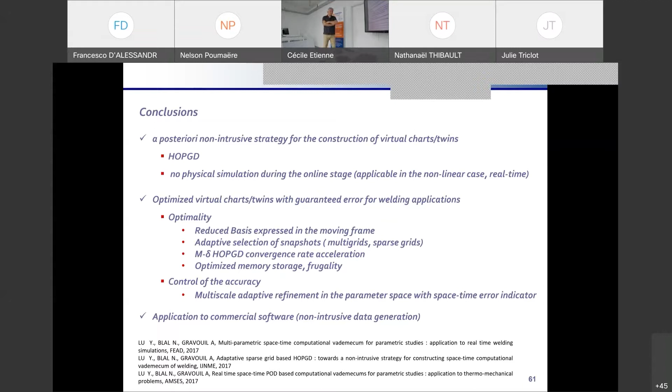So after this first introduction on physically based virtual twins, I propose a discussion on different prospects, improvements, or new applications of such virtual twins.

For instance, in the previous virtual twin dedicated to the real-time simulation of the welding process, we considered all the balance equations of the physics: balance of mass, linear and angular momentum, first and second principles of thermodynamics, and a given stress, nonlinear stress-strain law with possible internal variables.

Some other possibilities can be used today to build other kinds of virtual twins based on experimental data, which are called, for instance, data-driven virtual twins. This fits in the general framework of data-driven computational mechanics, which is very active at this time, for instance the ideas of Ortiz and many other authors in this area.

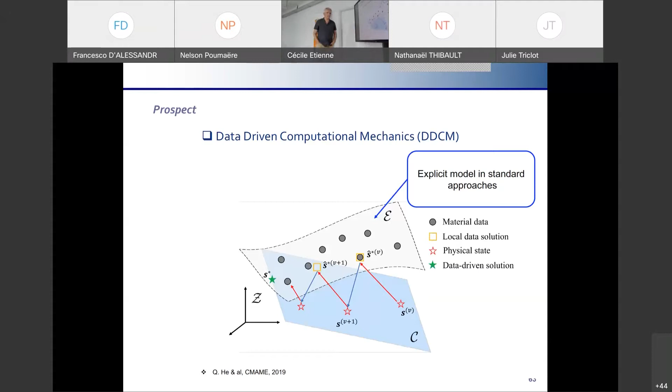There is a key point in data-driven modeling in order to build, for instance, virtual twins for welding or other kinds of multiphysics or multiscale problems: we assume that we have data, we assume that we have experimental data. But in practice, it is not so easy in solid mechanics, for instance, to have experimental data.

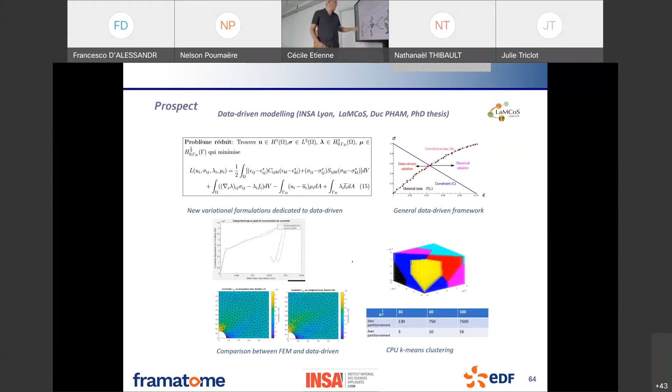Now I want to switch to another topic, which also concerns virtual twins. I focused in the previous presentation on material parameters - if we consider the space parameter, the time parameter, we can add material parameters. This is what we have done on virtual twins dedicated to welding processes, for instance. We have also focused, in a very simple case, on heat source parameter, an external load parameter for the system. And a very interesting topic also concerns geometric parameters.

We have already discussed the thickness, for instance, on the welding process of a plate, in order to develop virtual twins with a very simple first attempt at geometric parameters. But in the general case, it is a very complex task where we have to compare completely different geometries. A very interesting example comes from biomechanics, where you have to compare different kinds of meshes.

Which come from specific applications of virtual twins to aortic aneurysm. And in this case, if you compare two different kinds of bodies, you have completely different geometries.

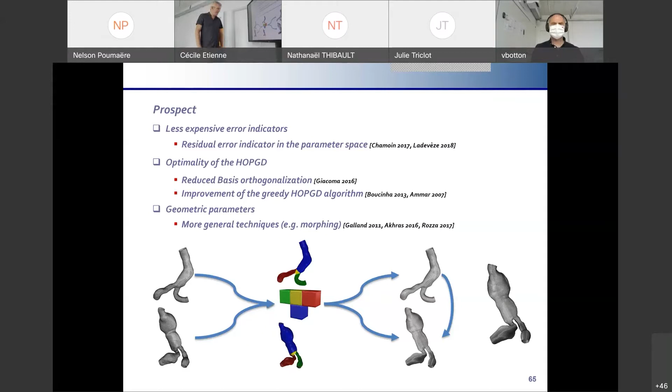In other words, a parameterization of the boundary and also the bulk. So we have to develop important concepts in topology in order to reach this goal. I propose here an isogeometric analysis, a suitable Trivariate model generation dedicated to ROM with geometric parameters. It is a complex way to explain what I said before, but it is the same thing.

So the fundamental question is: imagine you have two meshes, how do you compare the two meshes? Because we have not the same number of nodes, the same number of triangles. For instance, if you have a triangle decomposition mesh of the boundary.

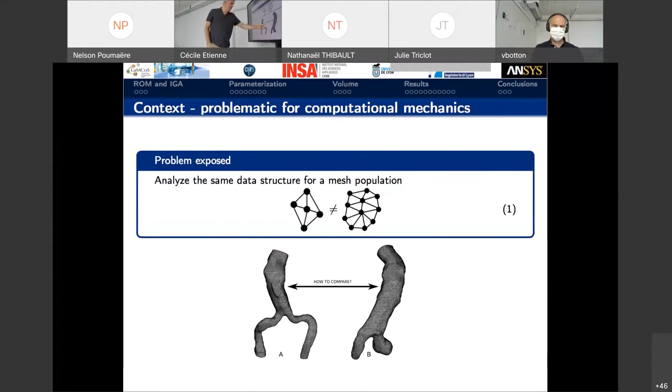In this case, the general aim is to be able to develop such a hybrid twin, a virtual twin. You have biomechanics applications, but also here, this very simple example comes from linear elasticity, solid mechanics. So the idea is to develop the same strategy as before, where you have geometric parameters linked to this problem.

And here you can have geometric parameters, material parameters, and what you want is that in real time, you get the new geometry and the new fields on the new geometry in real time. So here, for instance, the quantity of interest plotted on this new mesh is the displacement magnitude.

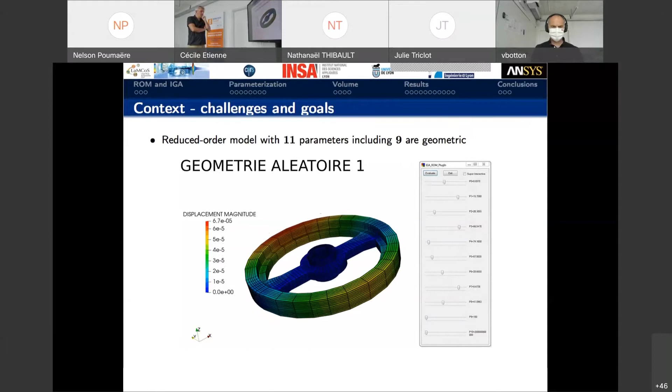In a linear elastic problem with specific external loads, what is interesting here is that you can see in real time, modify specific thickness, diameter, or length, and you have in real time the new solution on the new geometry.

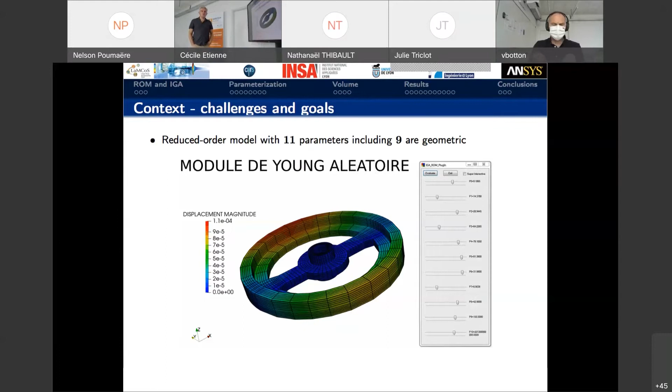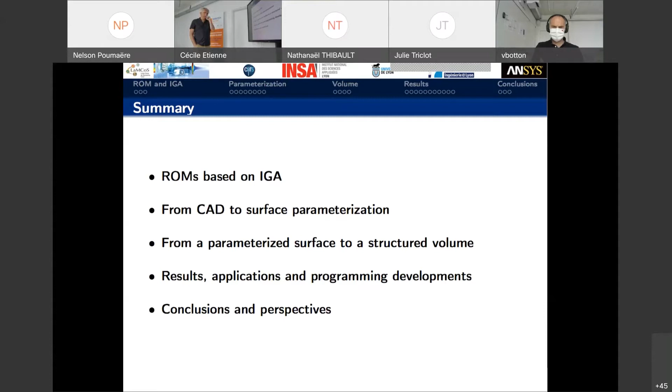We propose a general strategy based on isogeometric analysis, because isogeometric analysis is a very interesting way proposed by Professor Hughes in the United States, I think more than close to 15 years ago, in order to make a strong link between CAD and meshing and finite elements. This is an interesting starting point in order to reach the goal of virtual twins on geometric parameters.

So imagine that you want to make a link between computer-aided design and computer-aided engineering analysis, for instance, based on finite elements. You need a discretization, and the standard way is to use a finite element mesh.

However, as you know very well, in a finite element mesh, the description of the boundary strongly depends on the shape functions. And if you have a curvature on the boundary, you have only an approximation of the curvature in the finite element mesh according to the degree of the shape functions.

So from the exact geometry - what we call the exact geometry is the modeling in the computer-aided design software of the geometry, based for instance on splines and NURBS - the question is: is it possible to put this information in the finite element model instead of having an approximation of the geometry?

So if you want to modify a parameter, you have to come back to the CAD and then build a new mesh and so on. So it is quite expensive, not efficient, not frugal, okay?

Instead of doing this, we can proceed in this way. Imagine that you keep information of the true geometry, and then you put it in the finite element model as an information of the interpolation on the boundary and the bulk. So it is what we call isogeometric analysis. In this case, the shape functions are based on the functions used in computer design, okay, splines and NURBS. So it is a specific method.

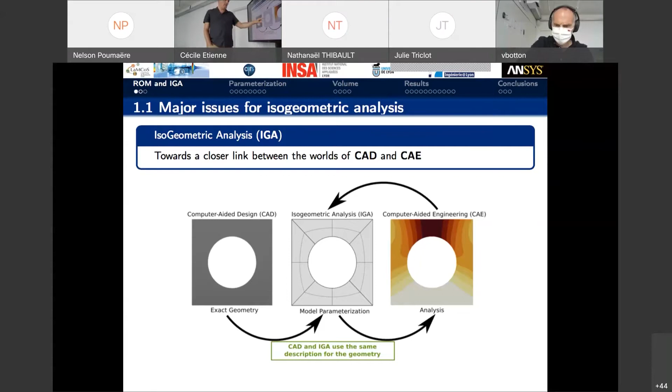So the question is: is it possible to build, in general, a quad decomposition of a complex geometry, and also a cuboid decomposition? It is an old dream, in fact, in meshing. Is it possible to build a mesh for complex geometries based on cuboids? So it is a complex problem in practice until recently.

So what is important to notice also is the information that we have from computer design. In practice, we have not bulk information. We have only information of the boundary. This is called BREP modeling, which is used for CAD, and is the basis for isogeometric analysis.

However, as you can see here, we have only the information of the boundary. BREP from CAD doesn't contain information in the bulk, I mean splines and knots in the bulk. It is only defined on the boundary. So there is also the question in isogeometric analysis of building knots and spline shape functions in the bulk of the mesh, which is not in the BREP model.

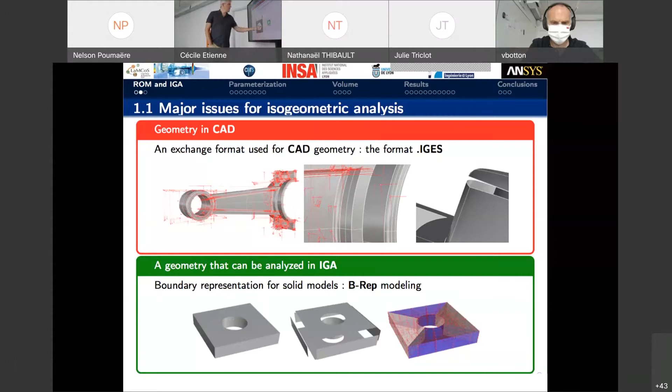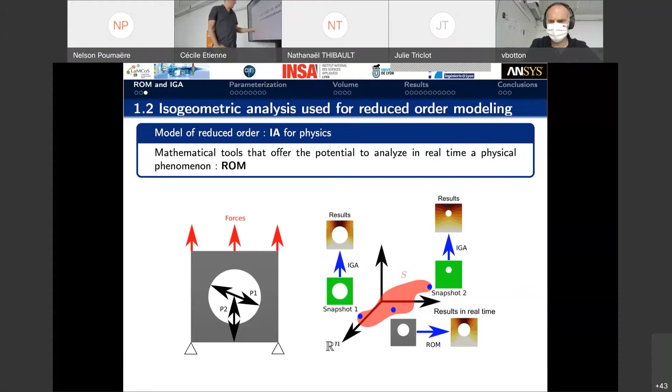Okay, some information. Generally speaking, a key point in the proposed approach is the quad decomposition. So I propose to give you some information from topology in order to understand the interest of quad decomposition in such an approach. And a key point is the Euler characteristic.

So if you have a closed, sufficiently smooth surface, possibly with holes in terms of topology, you can define the number of patches required to cut this surface in different pants. The number of pants is no more than 2 times the genus of the surface, plus b minus 2. I'm very impressed by this result, because here you have the number of pants required to cut a complex surface, like a sphere with 3 holes, which is no more than a pants, in fact. And this is very interesting because of 2 fundamental results.

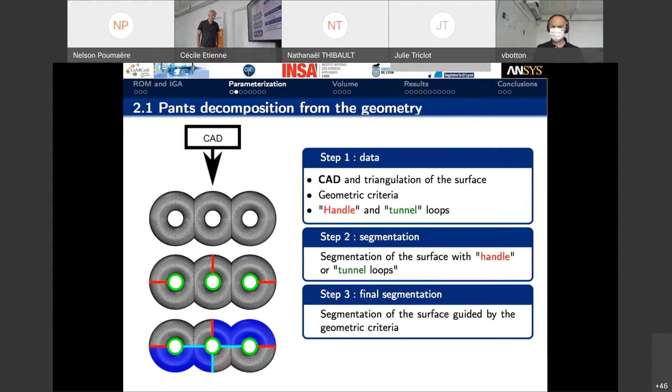So the idea is the following. First of all, a pants decomposition of a surface based on triangles, for instance triangle meshing of the boundary. Because if we are able to build a pants decomposition, then we are able to build a cuboid decomposition of the bulk, and by ensuring compatibility of the cuboid decomposition at the interfaces between the pants, we then have a global cuboid mesh. This is what I want to explain now.

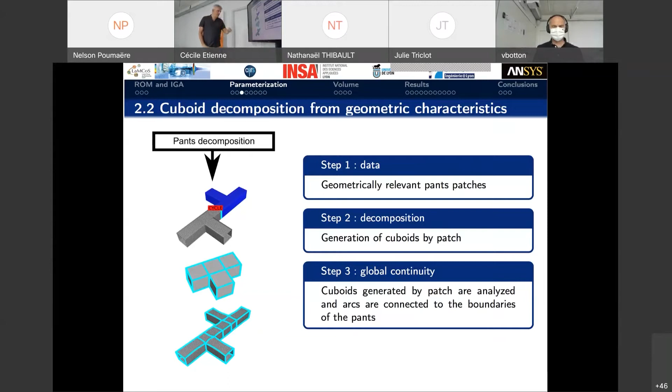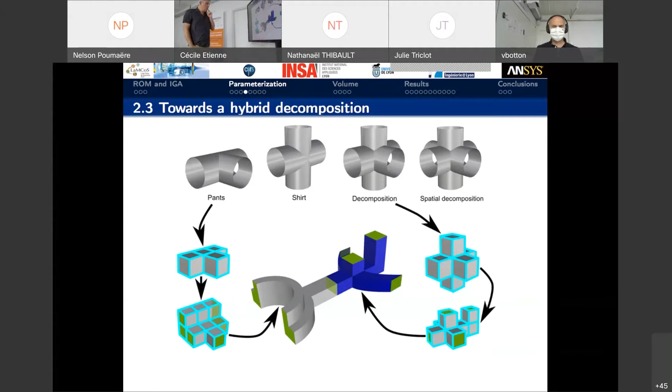We can generalize the concept of pants, but it is no more than an extension of pants in some cases where it is better to proceed to other decompositions, which are quite simple, in order to have, whatever the process, a cuboid decomposition. Even though we have a general result for pants, sometimes it is better to locally improve a pants in such a case in order to obtain a cuboid decomposition. What I want to explain is that in theory, a pants decomposition is enough to obtain a cuboid decomposition, or you can slightly improve the idea on specific geometries locally. Whatever way you follow, you have to end up with a cuboid decomposition.

A last important result from topology concerns the boundary. For the cuboid decomposition, I will explain later how to proceed. However, we need another step: the question is the parameterization of the boundary and the parameterization of the volume.

In fact, it is not so clear to have a quad decomposition of the boundary, because if we have a parameterization of the geometry, we have a quad decomposition of the boundary. Or if we have a quad decomposition of the boundary, we have a parameterization, because the quad is intrinsically a local tensor product of the boundary, which is not the case with the triangle. You have a non-uniform mesh, or non-plane surface - you cannot easily build a parameterization in terms of a non-Euclidean manifold. A local parameterization of the boundary is not easy with triangles, but with a quad decomposition, it is very easy.

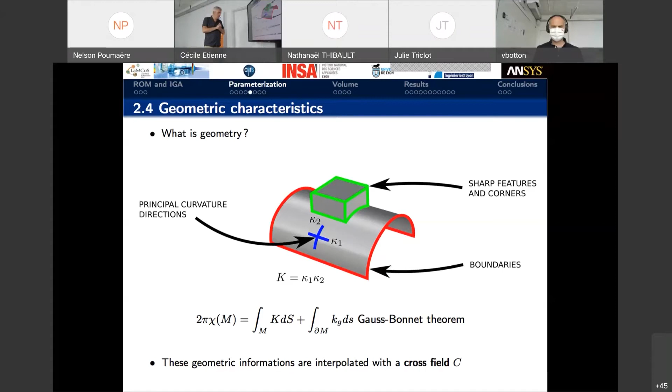Okay, so for that, there is a very nice method which comes from specialists of imaging and modeling of volume and surfaces, which is called cross field. So a cross field is no more than a way to build automatically a parameterization of a surface, for instance, based on triangles.

So there are some difficulties in order to build the parameterization of a non-planar surface because you can have singularities and so on. For instance, as you know very well, it is not possible to build a parameterization of a sphere with no singularities. You have a singularity on a sphere, and you can see it here. It is a well-known theorem.

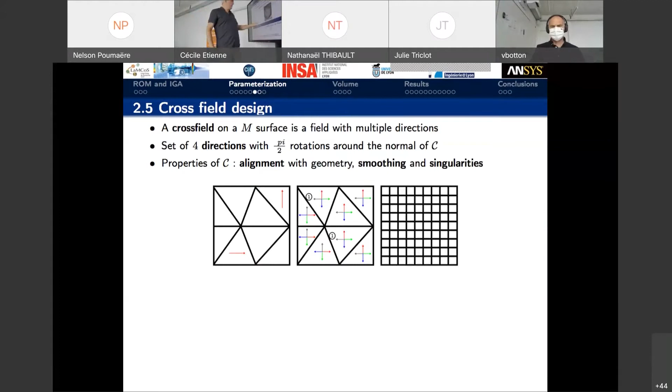So you have to account for also the problem of the singularities in parameterization of a surface. Okay, so it can be done by the Crossfields. You have a strong link between the Euler characteristic of the surface, which is a closed geometry of a volume, and the possible singularities which are to be accounted for in the parameterization of the surface. So here, as you can see, there is a link between the number of singularities and the Euler characteristic.

Okay, some examples of the application of Crossfields. Imagine that you have a given mesh based on triangle decomposition of the boundary. So we can proceed to a point decomposition. It is quite easy, in fact, to obtain a point decomposition. But the difficulty is to combine the point decomposition with the parameterization of the surface. Okay, so here the Crossfield reaches this goal.

It is a local field, okay? And this Crossfield is no more than a tensor product of two 1D functions, a combination of two 1D functions, which can be built automatically with specific constraints in the fact that the parameterization of the surface has to be compatible with the boundary of the point decomposition. Okay, so it is no more than the fact that the parameterization has to be parallel locally to the boundary. There is an iterative process that we can apply on the Crossfield in order to be compatible with the boundary. And at the end, we have a local parameterization of the non-planar surface put on the cuboid decomposition.

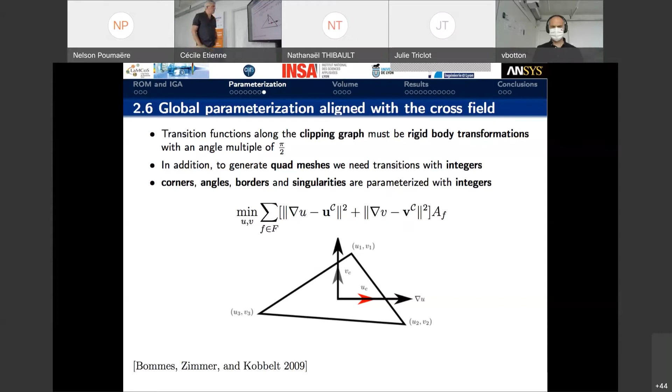Okay, and then at the end, what you have is not only a cuboid, but a band decomposition. We have not yet cuboid. So here we have a band decomposition combined with the Crossfield, a parameterization of the surface. So here it is an initial Crossfield, and after, as you can see here, the parameterization of the surface is not yet optimal because it has to be compatible on the boundary of the band decomposition. So now it is compatible, okay? So we have also to ensure the compatibility of the local parameterization on the boundary.

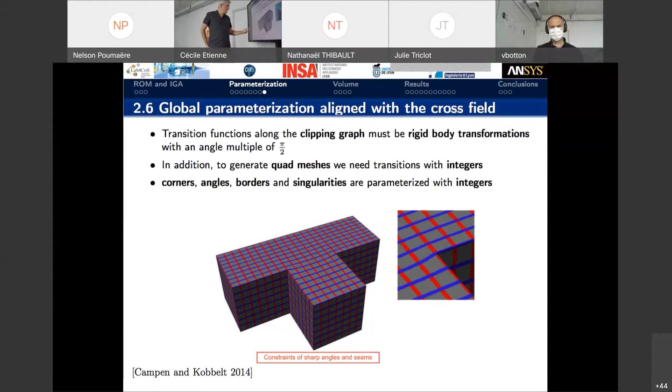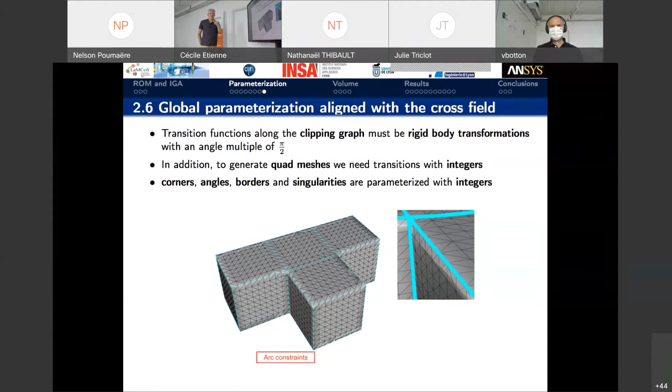And then we have something which is quite interesting, a cuboid band decomposition and a parameterization of the surface, compatible with the boundaries. Okay, here at the end, what we have is a quad meshing, based on band decomposition, and the starting point was only a triangulation of the surface. So starting from a triangulation of the surface, and based on the good properties of regularity of the surface and topology characteristics, I mean Euler characteristics, we are able to build automatically a quad meshing on band decomposition. So we have to keep in mind that we want cuboid decomposition at the end. So here we have a parameterization of the surface, and we account for possible singularities and so on.

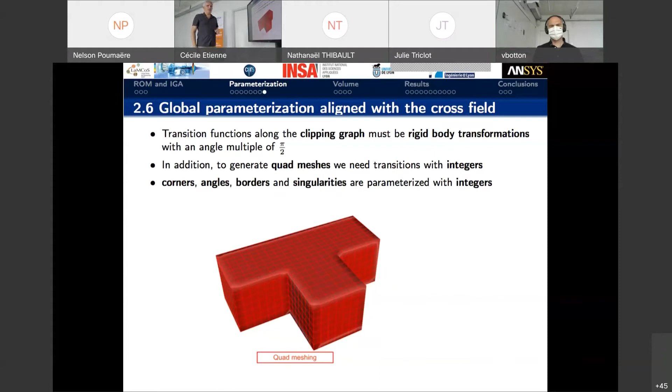So it is done in a very simple case, but it works also in more complex cases. If I come back to biomechanic applications, we can use the same strategy, and as you can see here, we obtain from a triangle mesh of the boundary, at the end, a quad meshing of the same geometry.

This is quite interesting because in this case we have the band decomposition, and at the end we have a parameterization of the boundary, so we are able to build a quad meshing of the boundary. Whatever the geometry, if you have the same topology, you can build a reference geometry based on the same quad decomposition.

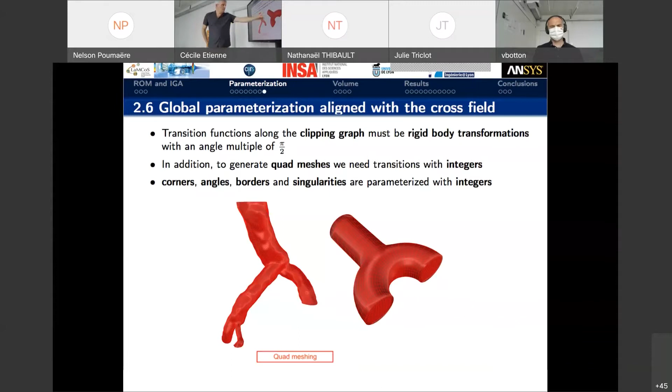So it is a way to make a link between different kinds of meshes, and the only link that you have between the different meshes is only topology. Here it comes from an engineering application, and here a biomechanic application.

And now, the question is, from this parameterization of the surface, in other words a quad decomposition and a band decomposition of the surface, we want a cuboid decomposition of the volume.

So now we have also to give you some information on topology in the 3D case of volumes. It is not so easy. In fact, it is an extension of the Euler characteristic, because if you remember fundamentals of topology, the Euler characteristic deals with only the surface of a volume. So if we want to consider the topology of the volume and not the boundary of the volume, we have to consider what we call the generalized Euler characteristic and the Betti numbers.

The Betti numbers are the physical content, I mean the geometrical content in 3D: the number of 3D holes, the number of cavities, the number of holes, and so on.

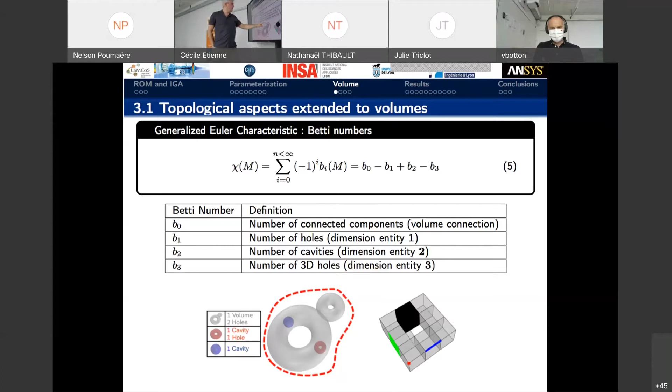A more interesting geometrical content of the generalized Euler characteristic is, from a discretized point of view, what we call a simplicial complex. I mean the number of vertices, the number of edges and faces, and possible volumes of the mesh. So it is what we want to use here.

So there is a strong link between the generalized Euler characteristic and these numbers. Here is the formula, okay, why not?

And then what we want to do now is to build a link between the generalized Euler characteristic, I mean a possible cuboid decomposition, a volume point of view in blue here, and the Euler characteristic of the boundary. In gray it is the boundary, and in blue it is the volume. So here it deals with the generalized Euler characteristic, and here it is the Euler characteristic, and here it is the genus of the volume. So there is a link between the generalized Euler characteristic of a volume and the Euler characteristic of a surface.

In the topology point of view, what we want at the end, what is the unknown? The unknown is the generalized Euler characteristic of the volume, the genus of the volume. This is what we want, this is what we seek, this is what we are looking for, okay?

So assuming that you have the Euler characteristic of the boundary, then you have a link between the generalized Euler characteristic and the Euler characteristic. Furthermore, you have a link between the number of nodes, the number of edges, and the number of faces of the mesh, the quad decomposition.

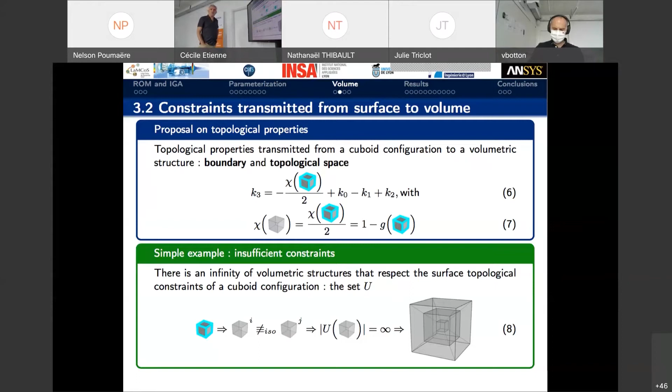So algorithms are available today to do that from a band decomposition and a parameterization of the surface based on crossfield and quad decomposition, we are ready for building this. For instance, it is, from a topological point of view, the same thing.

And the idea is to have a mapping between this reference configuration and the true mesh based on quads and cuboids. So the idea is the ability of such a strategy to make a strong link between different meshes by this reference configuration based on quad, crossfield, and cuboid decomposition, in order to build virtual twins on the geometrical parameters.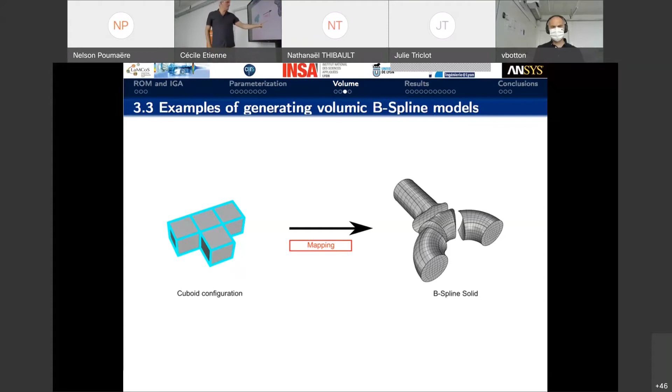Okay, so we can do that. I mean, B-spline solid modeling of 3D geometries based on quad decomposition of the boundary and cuboid decomposition of the volume.

Strong ideas: band decomposition, crossfields, and generalized Euler characteristic in order to build the B-spline solid, the parameterization in the bulk and the cuboid decomposition in the bulk. And all is linked to a reference 3D configuration by a mapping.

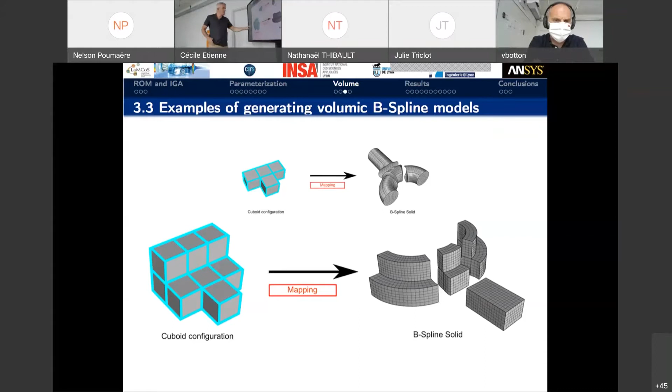And here, more complex examples, all is automatic. You have a BREP representation of the CAD, I mean only a spline modeling of the boundary. It is well known for computer design. And then you have an automatic process in order to obtain not only a quad mesh of the boundary, but also a cuboid mesh of the bulk.

So you have a parameterization of the surface. It is a non-Euclidean parameterization, it is a non-Euclidean manifold. You can have a locally orthogonal basis on the parameterization and also in the bulk, but globally it is not Euclidean, as you can see.

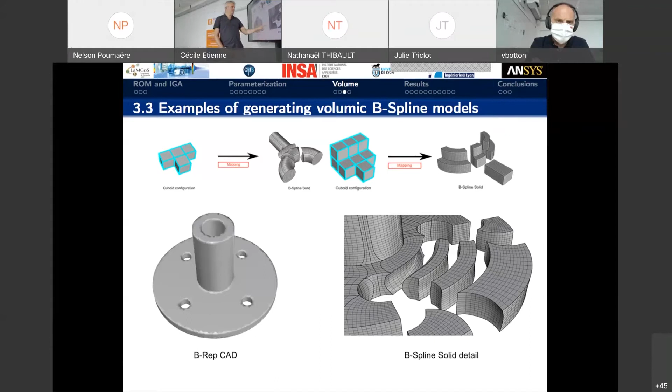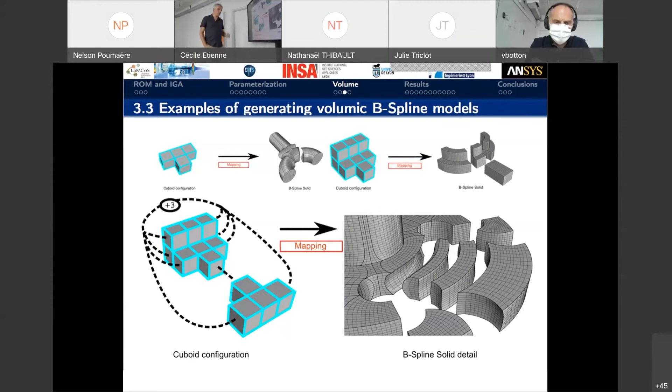However, here, due to the fact that you have a parameterization on the surface and in the bulk, you have a tensor decomposition on the geometric parameters locally. We can make a general mapping between a reference cuboid configuration and the true mesh, based on quads and cuboids. Here, now, we are ready for making a link between different meshes.

Whatever is the geometry, assuming that we have the same topology, the idea is to build a reference geometry which allows the mapping between the reference geometry and all the other geometries. By this mapping process, we have done a mapping between geometry A and geometry B from a topology point of view.

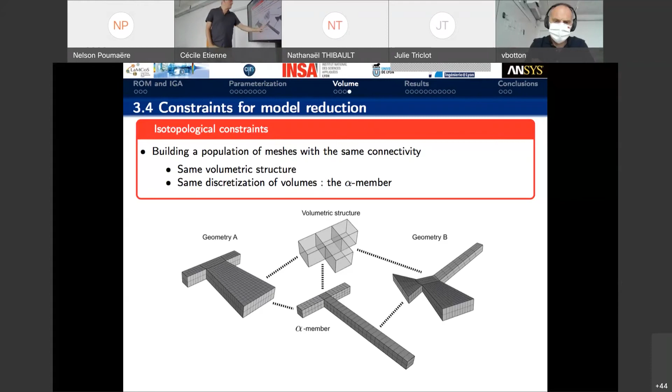Some examples, application to virtual twins on geometrical parameters. Here it comes from large strain. It can be of interest in order to control the shape of a large strain mesh, because you can have difficulty to mesh in large strain.

And here we have shown that this specific application of band decomposition and cuboid decomposition is very well suited for large strain. If it is possible to have such a mesh, it is of great interest for large strain in order to improve the robustness of the simulations.

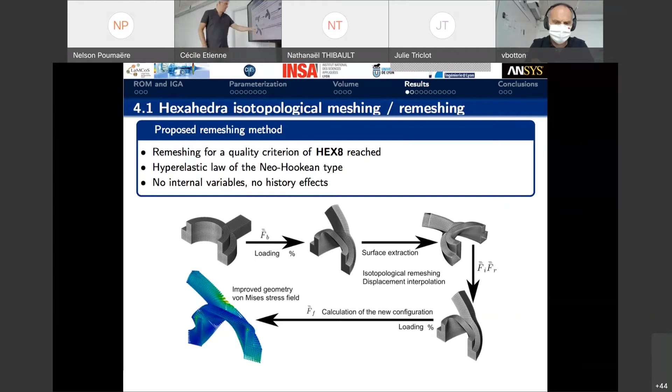More interesting, sorry to be fast on this, more interesting is reduced order modeling for virtual twins, in order to have in real time a virtual twin with possible geometric parameters.

Okay, I don't know why, but here there is a movie, I don't know why it doesn't work. Ah, yes, okay. So here is a possible application of this virtual twin of a cardiac cycle of a ventricle, as you can see here.

So at different positions of the cardiac cycle, we have 3D imaging and we have different meshes. But what we want is the same mesh, in a topology point of view, at each position of a given cardiac cycle, in order to proceed to simulation in real time of such a problem. As you can see here, a key point is a quad decomposition of the surface.

And here, what is nice is that we can proceed. We cannot proceed to a singular value decomposition on the first mesh, but we can proceed to a singular value decomposition on the second one. Or, generally speaking, a high order proper generalized decomposition on the second one, or a sum of a product of 1D functions, a tensor decomposition based on the parameterization of the surface.

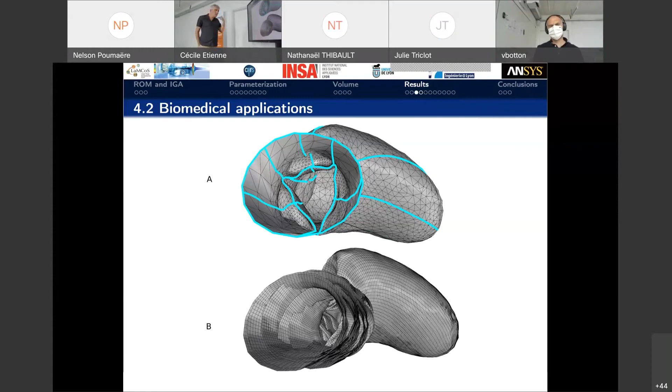So the geometric parameter virtual twin based on geometric parameters is more difficult to understand physically.

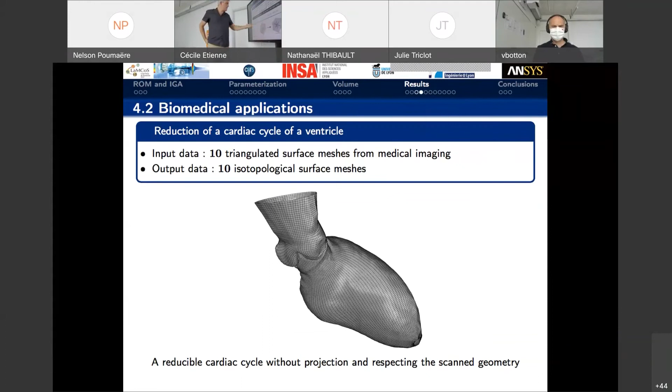Now I want to focus on the 3D case. I use the same tools as explained in the first part, a reduced order model based on high order proper decomposition. In order to optimize the number of snapshots, I propose to use a sparse grid technique with adaptive multi-grid techniques to minimize the number of snapshots in the multiparametric space. We have to optimize the number of snapshots.

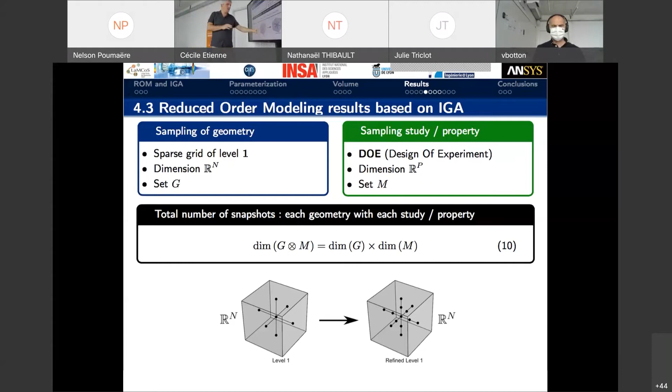What is a snapshot? A snapshot is a given geometry, within the possible parameters we have defined on the geometry. If we modify the geometry, we have a new snapshot. This is the idea for geometric parameters. We define the possible values for each parameter, and that defines the hypercube of the multiparametric space for geometric parameters.

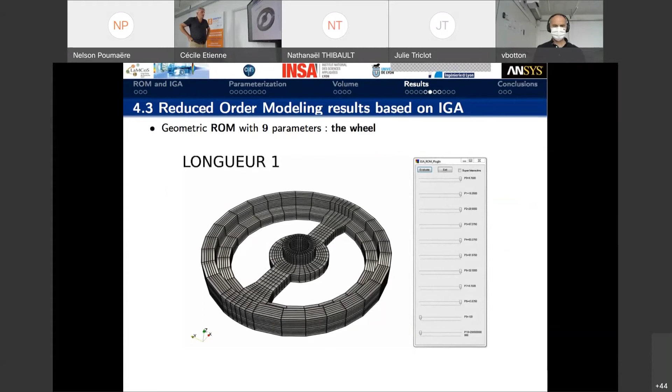So at the end, we use the same tools, and we can build the following virtual twin. Here is a very simple engineering application. You recognize the wheel we already studied before, and in real time we can adapt the radius, the thickness of different parts, and so on. Here we have 9 parameters, and we can add mechanical parameters if we want. What's important is that now you can see clearly we have a quad decomposition of the boundary, a cuboid decomposition of the bulk. Whatever the value of the parameters, we have topologically the same mesh on the boundary and the bulk. We have a boundary parameterization and also a bulk parameterization, and it is a key point for reduced order modeling and for virtual twins with geometrical parameters.

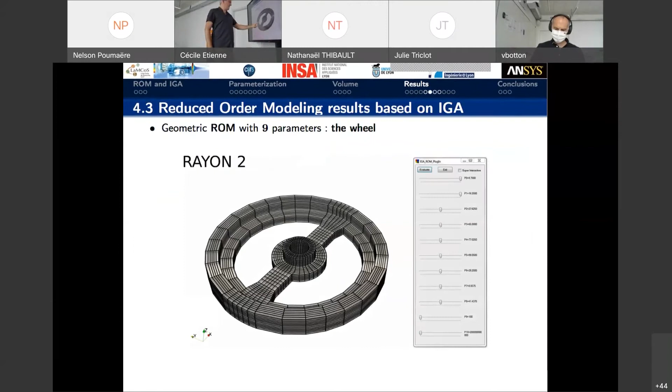Okay, the same thing. Sorry, I have to... come back, sorry. Okay, already done. Okay, I have to wait for a few seconds. Okay, it works.

So here is the same thing, now we have geometric parameters, and in the virtual twin we add material parameters, for instance the Young's modulus. We can add a random load, the position of the load can be random in a specific domain of values, why not. Then in real time we have the solution in terms of 3D fields, for instance the displacement magnitude on the new geometry. It's also based on boundary decomposition, quad decomposition, and parameterization of the surface, and the same thing in the bulk, cuboid decomposition with bulk parameterization. The idea of the tensor product is a fundamental property we have used, and it comes naturally from isogeometric analysis.

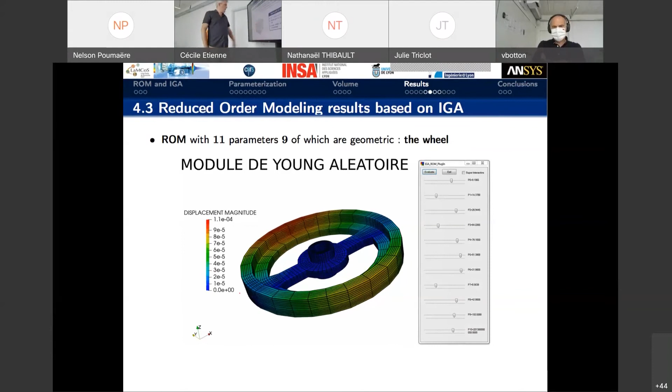Optimization of the number of snapshots is not so easy, so I propose here to use sparse grids. In order to reach a given level of accuracy, we can use a specific error indicator based on the separated variable representation of the virtual twin.

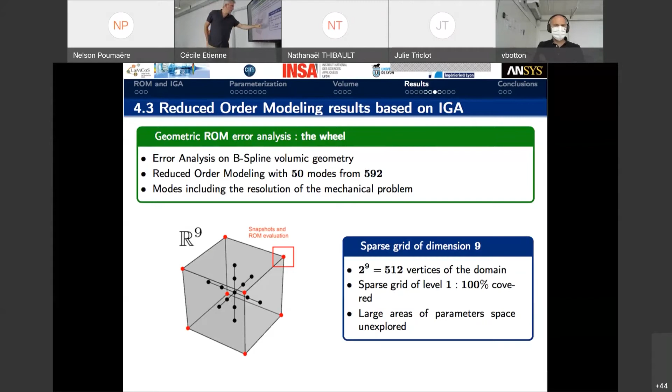We can have other kinds of examples. Errors from a geometrical point of view are more difficult to plot. When we compare a field with a reference one, it's easy to understand what a stress field is, but the error on geometric parameters is not so easy. For instance, we can have localized errors in the mesh which are not so easy to detect when building a mapping between the different meshes, in the reference one. This can involve errors in the virtual twin, so there is still room for improvement in the mapping between the reference and the cuboid decomposition of the true mesh.

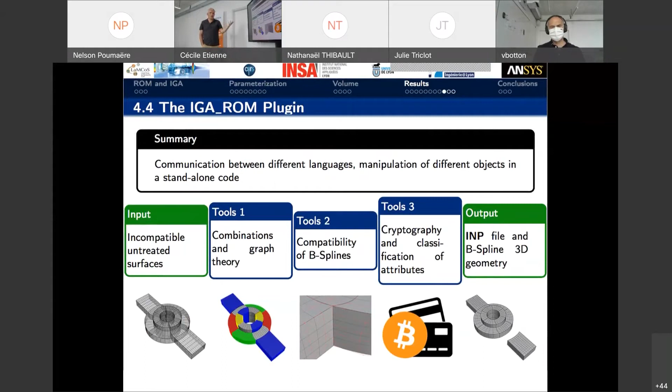So it is a starting point. It is the first attempt of something which is like a dream. It is a strong link between computer and design, in fact.

Isogeometric analysis, a mechanical model, a solver physically based on balance equations, and a reduced order model. This global tool, I think it doesn't still exist. However, it is maybe an interesting point of view in order to develop automatically the offline stage and to build automatically a virtual twin, in a frugal way, with the ability to use it in real time on the online stage. So here I think that there are many possibilities.

It is not yet standard to develop a strong link between the geometry, the mesh, and the equations of physics, and also to be non-intrusive at a given level of accuracy, to build automatically virtual twins. So it is the first attempt to do that on geometrical parameters in collaboration with ANSYS software.

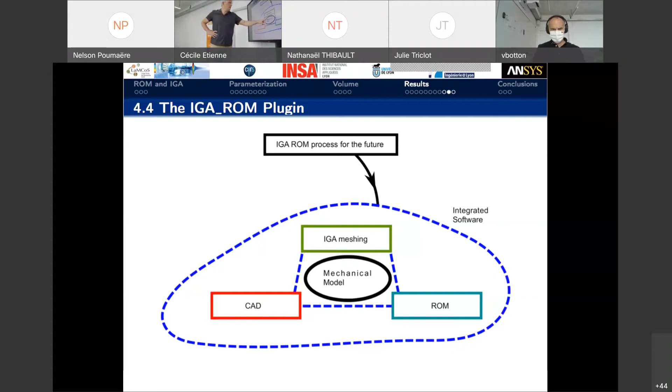Maybe I have a last part in my presentation this morning on optimization. So maybe we can take a few minutes now for discussion before concluding this presentation on the third part. I can take a few minutes if you have a question on this, as you want—if there are some questions on virtual twins with geometrical parameters.

So for instance, here, for this problem with 5 parameters, 200 snapshots were required. On the offline stage, the CPU estimate was close to 35 minutes. And the post-processing step, the online stage, in order to recover the result in real time for a new geometry with a new geometric parameter and the good field—in terms of linear elasticity, because it is a static problem—it takes 3 seconds to plot the new geometry with the new field. So it is not exactly real time. However, it is quite fast, and it can be enough for a preview of initial simple use of such a virtual twin.

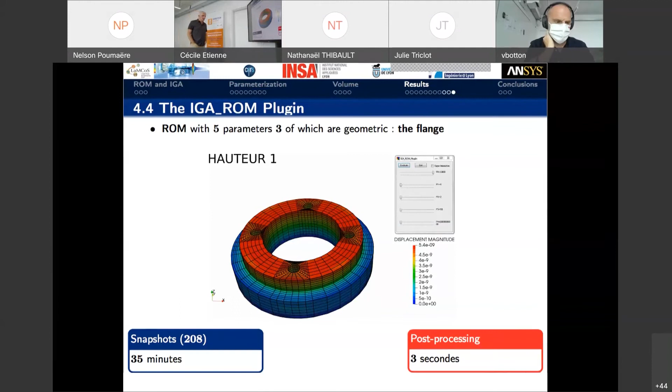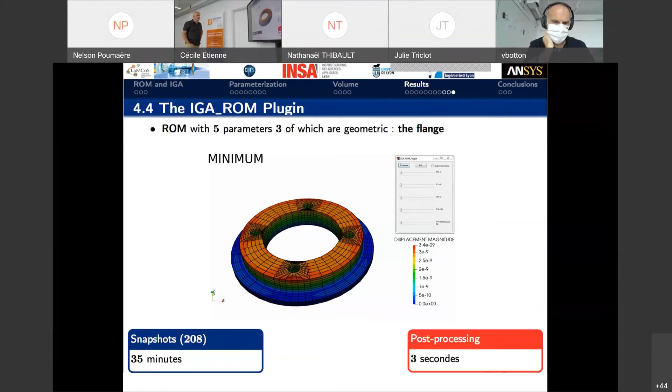There is still room for improvement for obtaining the solution in real time and so on. However, the global strategy seems to work well in this case. Another example.

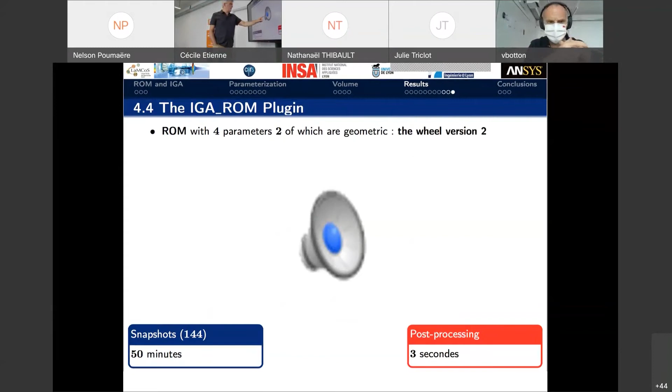It is another kind of geometry. What is nice in this geometry is that you have, globally in terms of topology, 1, 2, 3, 4, 6 holes in this volume. In the same way, it is possible, as you can see here, to build a quad mesh of the boundary, and also a pants decomposition and so on, Crossfields, and then a parameterization of the volume. And here, according to the 4 parameters in this example, the offline stage is optimized and concerns close to 150 snapshots and less than 1 hour. And here we can obtain the linear elastic solution of such a problem.

Here you can see the displacement magnitude and the deformed mesh in 3 seconds. So it is not completely real time, but it is very close to real time. Also here in this virtual twin, I think that there is a material parameter—I see the Young's modulus—so you can also modify the Young's modulus in this virtual twin.

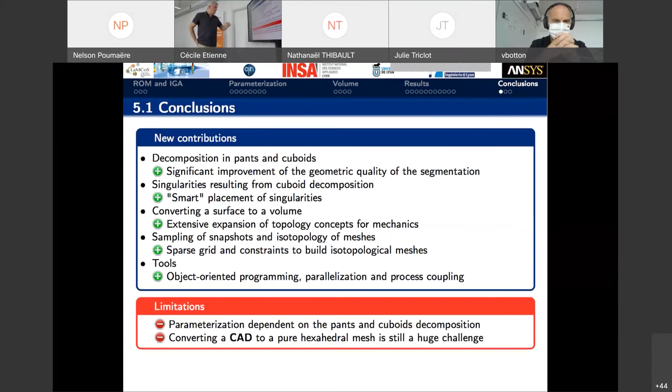Some conclusions on the possible prospects and new improvements of such approaches. I don't think it is required to detail this. Generally speaking, what is interesting here is the strong link that we propose between computer-aided design, meshing, and reduced order modeling for developing a general strategy in order to obtain virtual twins.

Okay, if there is no question, I propose to conclude this presentation on virtual twins for mechanical applications, by a last example, a multiscale example, and the ability of reduced order models also to be efficient for multiscale problems.

So I think there is a question. Yes, here. Okay, so this person, you try to optimize. What is the link to geometrical optimization methods? In this case, there is no optimization at that time. I will discuss optimization of the geometry in the next talk. But here, what we want to have is only a virtual twin with a geometric parameter. In other words, you imagine that the radius, the thickness, or a specific length is a parameter of the virtual twin. You modify it, and in real time, you have the new mesh, the new geometry, and the fields put on this geometry according to the governing equations. Good physics. This is what we wanted to do here.

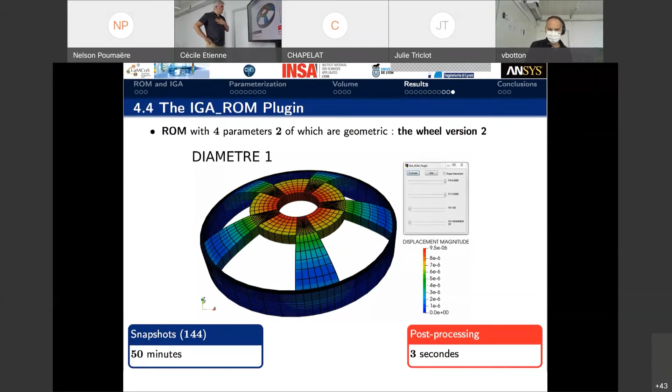Here, what is interesting about this approach is that we introduce, in the same way as before, a memory effect in computational mechanics on geometrical parameters. Now we are able to build a link between different kinds of meshes. The link between these meshes is only topology, in fact, and roughly speaking, a link on boundary conditions, on materials, on possible external loads. But it is a starting point in order to make a link between different geometries instead of starting a new calculation with a new geometry. If we keep in mind such information, we can have a good estimate in real time. And I agree with Valérie, according to the fact that we reach an enough level of accuracy on the mechanical fields.

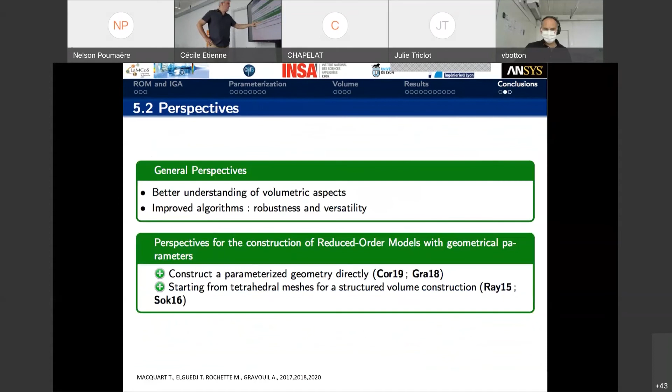Now, other examples. I propose to conclude this course on virtual twins, physically based or applied to mechanical engineering, on multiscale computational mechanics. The idea of a virtual twin is very interesting for real-time application, for simulation in real time of processes, for instance welding, or as we have seen before, geometrical parameters. However, it can also be of great interest in order to introduce something like a memory effect, I mean virtual charts or virtual twins of a specific material. As you know very well, in computational mechanics, solid mechanics, or this kind of physics, we have different scales: the scale of the component, the scale of the structure, and also the scale of the material, for instance, in the simplest way.

The material, in fact, in the simplest models, is no more than a homogenization of very complex materials at a finest scale. If, for instance, you consider steel, you have grains and so on. So at the finest scale, you have a high level of complexity. Nevertheless, at the end, you have no more than a Young's modulus and a Poisson ratio in the linear elastic regime. So the question is: is it possible to introduce a memory effect to develop specific virtual twins for multiscale problems?

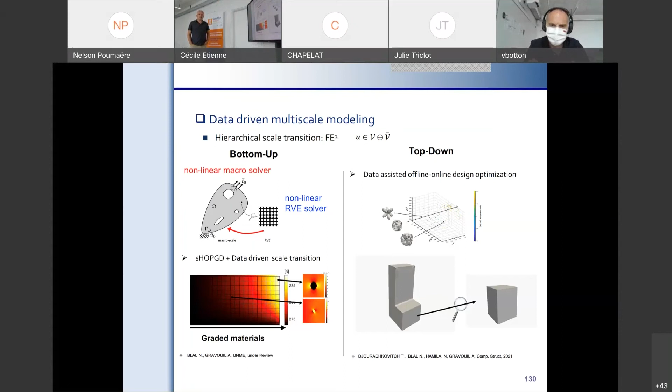This was done in collaboration with Lyon, Milan, Blal, and the PhD student was Tristan Djourachkovitch on this topic. It concerns the application of virtual twin on innovative micro-architectural materials and application to multiscale topological optimization - what we want to optimize is the fine scale and the coarse scale at the same time.

But it seems that there are some materials that are not yet available, where the Young modulus is quite high with an optimized density - a small value for the density. Such materials are very interesting and have been studied in detail for more than 20 years.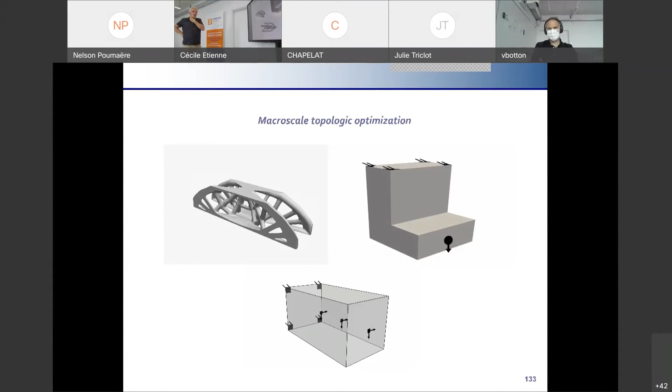So here we assume that we have, for instance, a linear elastic material still - nothing new on the fine scale. But at the coarse scale, we can obtain very nice shapes according to the possibilities depending on the boundary conditions and the loads. It all works in 3D here, and is mainly based on a level set approach.

Here we use level sets in order to optimize the geometry, and then at the end it is a compromise between the Young modulus and the density. This has been well known for a long time now. Those methods are available at the coarse scale, and here are examples of such optimization at the coarse scale with the level sets.

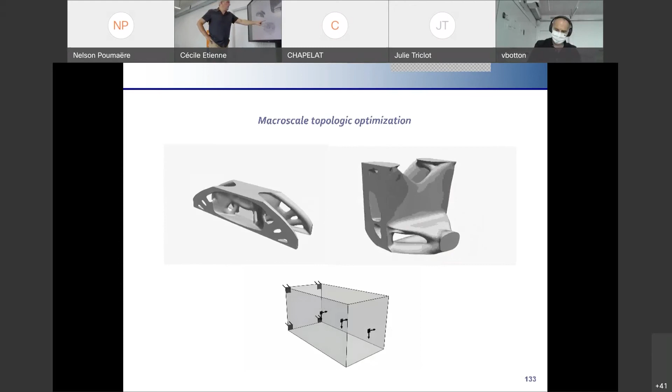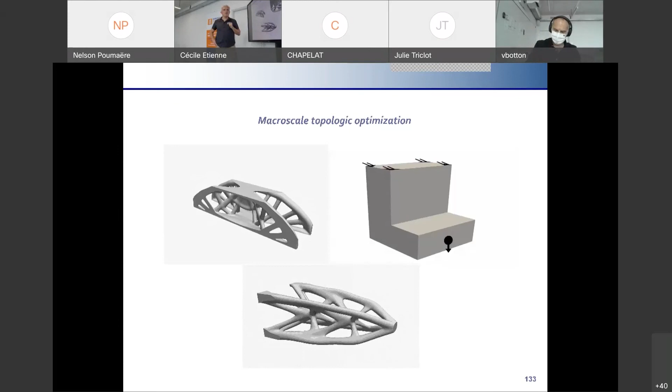But now what we want to do is the same thing plus the optimization of the fine scale, I mean the material. Here we assume that the material is based on two parameters - it is still an isotropic linear elastic material based on Young modulus and Poisson ratio.

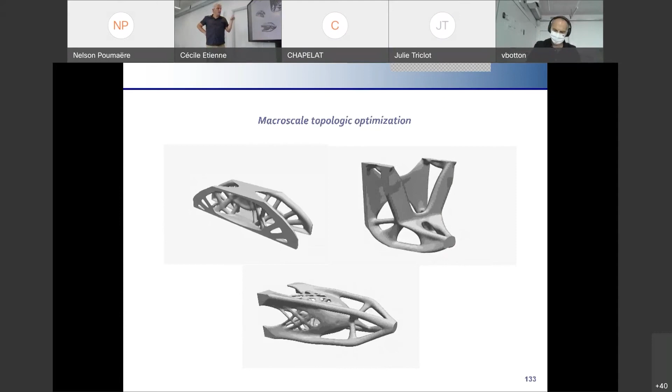But the question is: is it possible to do better than an isotropic material? For instance, one can wonder if one can obtain better results in terms of density if we optimize the microstructure at the same time - meaning we decrease the density of the material, with holes in the materials at the fine scale.

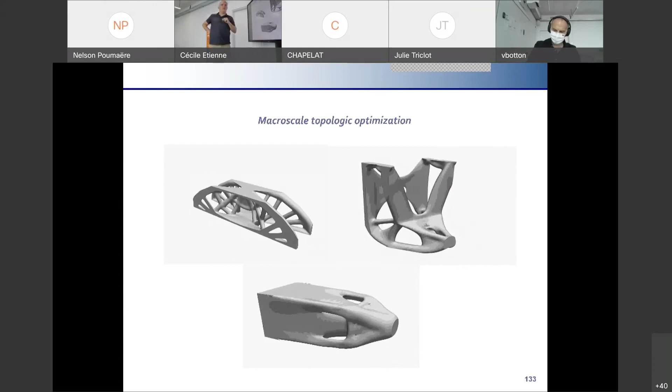Okay, here's an example of a very simple case, but it's all in 3D, it's important. I hope that it works.

Okay, so here the idea is the following. We propose to follow a given prescribed coarse scale, in terms of linear elasticity. Here are the components of the Hooke tensor in the Voigt notation, which is very well known. Assume that you give some parameters on the Hooke tensor, and then at the end we want to optimize the density. So we have an iterative process, exactly the same as before. It is an optimization process, but we don't optimize exactly the same Lagrangian, the same quantity of interest, because here we optimize a prescribed effective linear elastic material and the density.

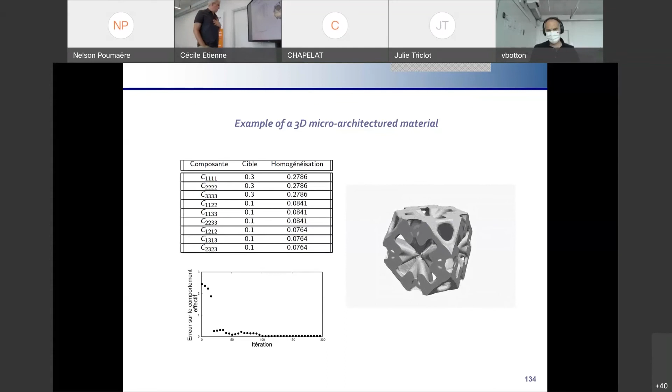And here, what is nice is that we can obtain very surprising microstructures. And such microstructures now can be obtained by additive manufacturing. This is what we hope to have at the end of this process.

More interesting, it is also possible to have here, as you can see, negative Poisson ratio. As you know very well, standard material in nature has only Poisson ratio between 0 and 0.5, corresponding to incompressible materials for 0.5. But theoretically it was discovered more than 150 years ago that Poisson ratio can also be negative, until -1. However, in nature it was not possible to discover a material with negative Poisson ratio. In other words, when you have a tensile test, you have a uniform decreasing of the profile along the bar - in natural materials you don't have such a possibility to have a negative Poisson ratio, because in practice very often what we have is only a positive Poisson ratio.

However, with such materials, imagine that you prescribe the coarse scale with a negative Poisson ratio - the algorithm finds a solution, and this is what we call an auxetic material. An auxetic material is a material with negative Poisson ratio, and it depends if the material is isotropic or not. Here we have an anisotropic material, so we can have different Poisson ratios, and some can be positive and some can be negative. Depending on the case A, B, and C - in case A, all the Poisson ratios are negative, it's an anisotropic material in the Hooke tensor. In B, you have three specific Poisson ratios negative, and the same for C but not the same values.

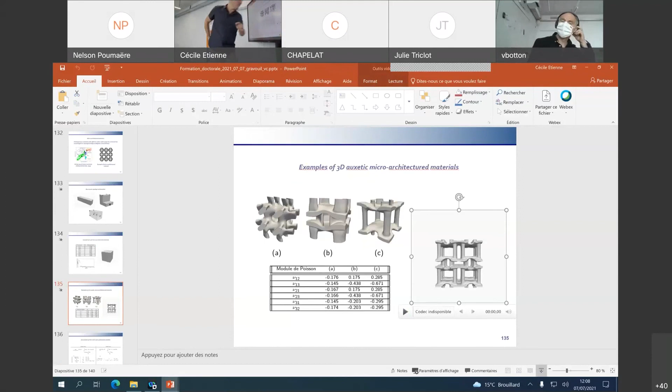I hope it works. I think it's the end of the morning, so the computer seems to be acting up. You need to click with the back of the pen. Ah okay, really on the pen, to the left there. That might work, because it was working. Unfortunately, it doesn't work. I will try to find another example. Sorry. I hope it works now - yeah, it works, I had a problem with the movie.

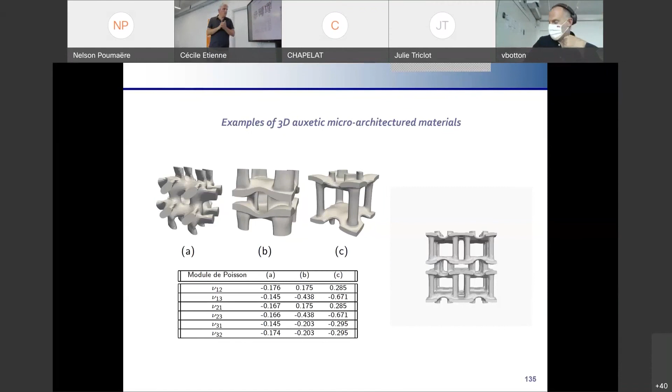So what we can see in such a movie is that when you proceed to a tensile test on this micro-architectured material, you have an increasing of the profile, okay? And this can be obtained by such micro-architecture.

In a mathematical point of view, it is possible to write, in terms of Lagrangian minimization of functional, the optimization at the coarse scale and the optimization at the fine scale. It is not exactly the same problem. On the left is a standard optimization of the coarse scale, in terms of Young modulus and density. You can see in the Lagrangian that you have something close to the elastic energy, and an optimization on the volume of the material, and you can define a parameter if you want a specific compromise between elasticity and density with the reference problem on the coarse scale.

And here is the problem on the fine scale. In order to optimize with a specific condition - you recognize here periodic boundary conditions - the material at the fine scale follows a similar shape of the Lagrangian.

However, it is an optimization of the fine scale. And the idea is to have an iterative process between the two scales.

Some examples. Here, if you remember the bending test, it is a standard bending test. You assume that the starting point is a rectangular geometry with prescribed displacement to 0 on the left, and on the right you have a bending load in the middle of the geometry. Here is a standard optimization of the coarse scale, and it is quite well known that we obtain such geometries.

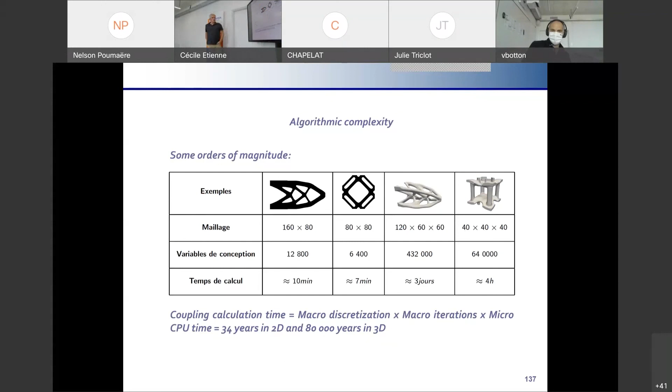Here are examples of such a strategy. We use the same strategy as before. We build virtual twins of the fine scale.

According to parameters which come from linear elasticity, we optimize the density at the fine scale, and we build a vademecum of different kinds of micro-architectured material, according to negative Poisson ratio, positive one, anisotropic one, and so on, according to the theory of the Hooke tensor.

It is not a simple tensor, the Hooke tensor, because it is a four-dimensional tensor. So a good idea can be to build such virtual twins on the tensor decomposition of tensors of order 4. And it is quite complex because there is no unicity. When you have the decomposition of a tensor of order 4, there are many theories for that.

However, the idea is to have the smallest virtual twin which contains all the possible materials of the Hooke tensors. Anyway, imagine that it is possible to do that.

We proceed to an offline stage in order to learn the different microarchitecture materials in 3D. And then, on the optimization process of the coarse scale, we hope to obtain the information of the optimized material at the fine scale in real time.

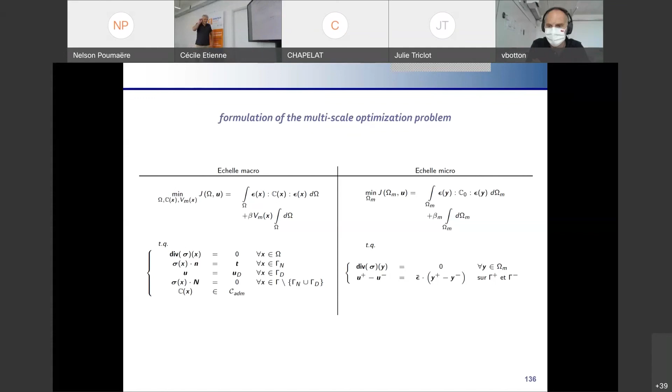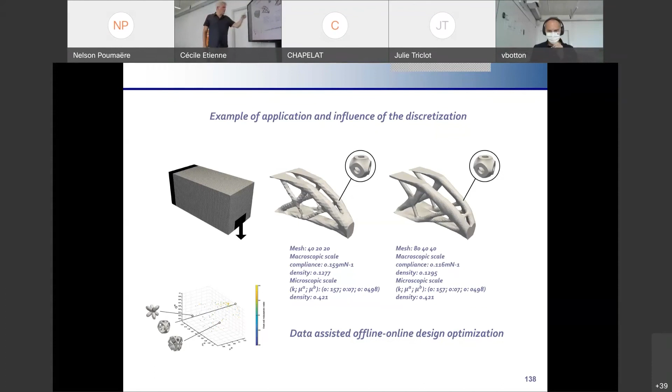So there's the mesh dependency of the coarse scale and also the fine scale. There is already, however, a global difficulty in optimization. Don't forget that even on the coarse scale or the fine scale, there is not unicity. So clearly, sometimes you obtain a given solution or another one because the solution is not unique. So even for the material, the solution is not unique. However, when we have a solution, we assume that it is a good estimate. But we have to keep in mind that the solution is not unique on the coarse and the fine scale, and furthermore, the combination of the two.

So I have to conclude. I think it's time to conclude. Here, this morning, this conclusion is quite general.

Data-assisted computational mechanics approaches are efficient tools to deal with the following challenges: first, the high-dimensional multiparametric spaces that we have used in the virtual twin for the simulation of process, for instance welding, and also geometrical parameters, and at the end, multiscale optimization of micro-architectured materials. It is clear that 10 for the dimension of the multiparametric space is already challenging. I don't think that with such approaches you are able at this time to reach a dimension close to 100.

Okay, there is still room for improvement, I think, in order to reach high dimensional space, close to 100. This is quite challenging. Furthermore, here are the main constraints I want to keep in mind on such hybrid virtual twins: we want to build virtual twins that are physically based, with a strong physical content, I mean balance equations.